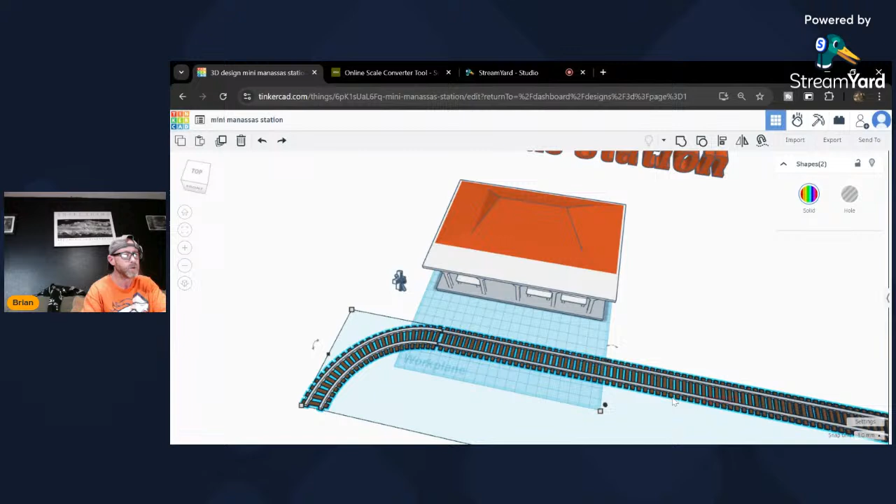So I found these train tracks in Tinkercad, and I was playing around with them just for fun. But it's good for pictures like thumbnails and stuff.

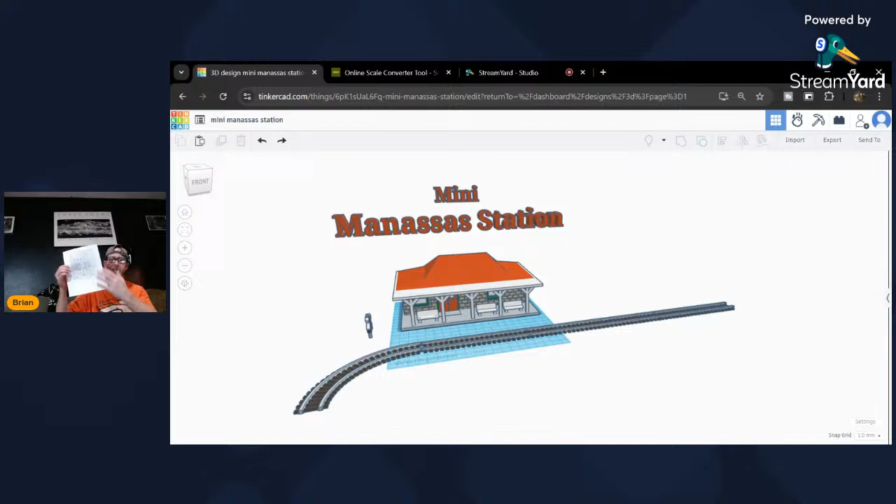So, without further ado, we can begin to work on this. I've got a little cheat sheet over here that helps me with my math and measurements. I wasn't going to show this in the beginning, but decided it'd probably be better, especially if I wanted to hang out and chat with y'all a bit, to at least have something nice up there that you could see.

I think he's got a guy with a bag and parcels, the uniform and everything. Maybe that's what I was thinking, but no, I don't think I've seen it, and it's definitely not that way. I don't see a lot of boxes either, maybe that's because of size, but I don't have any on mine now that I think about it. All right, let's get this stuff out of the way.

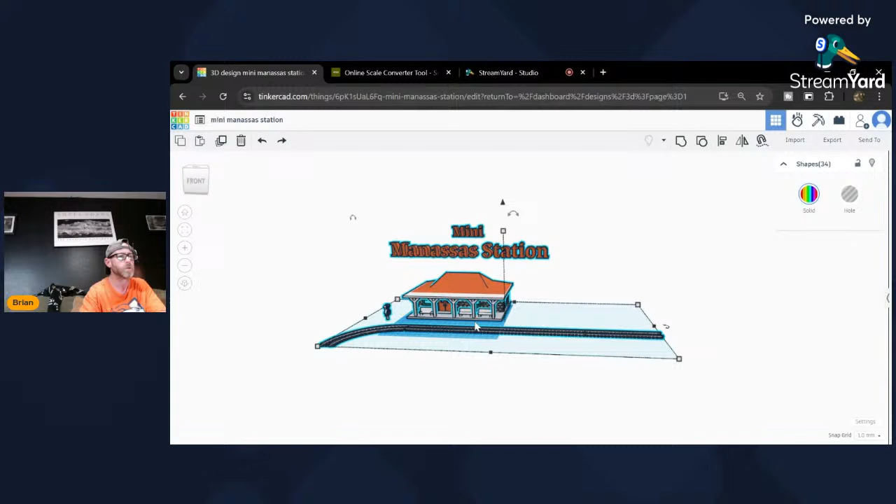We're 14 minutes in, so we might want to start building.

I could probably do this pretty quick if everything I wrote down is accurate, which could be a whole other ball game. But I did try to organize it to the best of my ability, it's on a spreadsheet and stuff. It is my handwriting though, which is the problem - that could cause us some trouble right there.

So what we're going to do is a mini train depot, a model of Manassas Station. I'm going to do a replica of what the real one looks like, probably in scale, and I might even have to do it in Z scale, and it's still gonna stick way out, so much longer. It'd probably be like this, where my cursor is now - down to here if I was doing the real one.

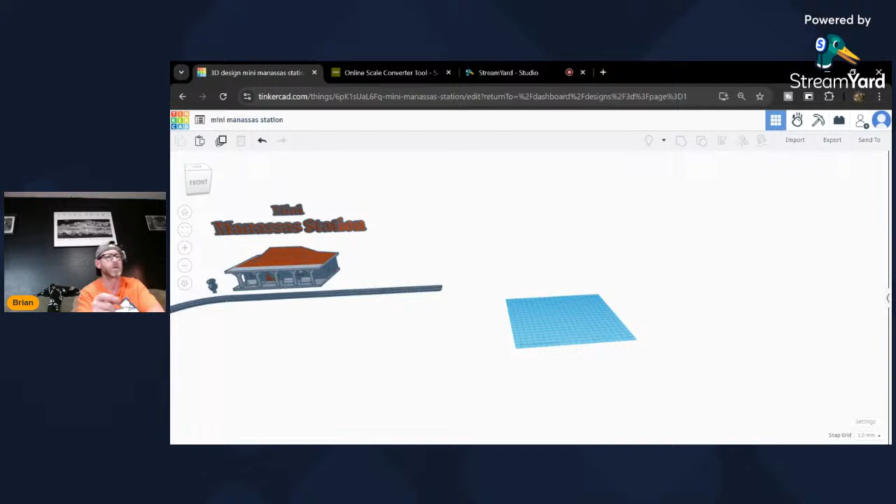The problem with that is trying to show people who are new to Tinkercad how to cut up the model that much and in that many pieces. You've got to do some extra supports if you have more than one dovetail joint at a time. What I actually do most of the time is have interior walls in there that prevent the need for that, for any more than two being joined.

So we're going to start out with the base as always. We're going to make a rectangular base that is 180 by 124 by 3 millimeters. If I do this, my stuff comes back, and we'll change our color. 180. 3.

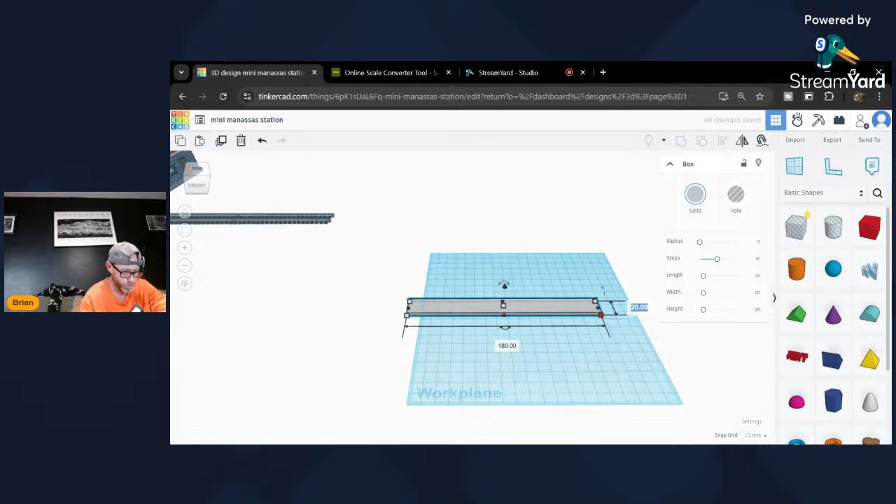If any of you guys already use Tinkercad and you see me doing something repetitively that you have a better way to do, please tell me. I am not above learning from anyone.

Well, I think a few of y'all mess around with it. Dwight, you mess around with Tinkercad if you're still there, a good bit, huh? I mean, you're pretty good at it, I think, unless I'm mistaken. Because you do cars and stuff - I just thought about that. Don't you do cars and stuff? I know I've seen videos of you printing cars. No, okay. But you print stuff, right?

Alright, and now we need the building. And the building is 174 by 80 by 40, by 2.

Okay, I understand. So we're going to bring what is going to be the body of the building, and it is 174.

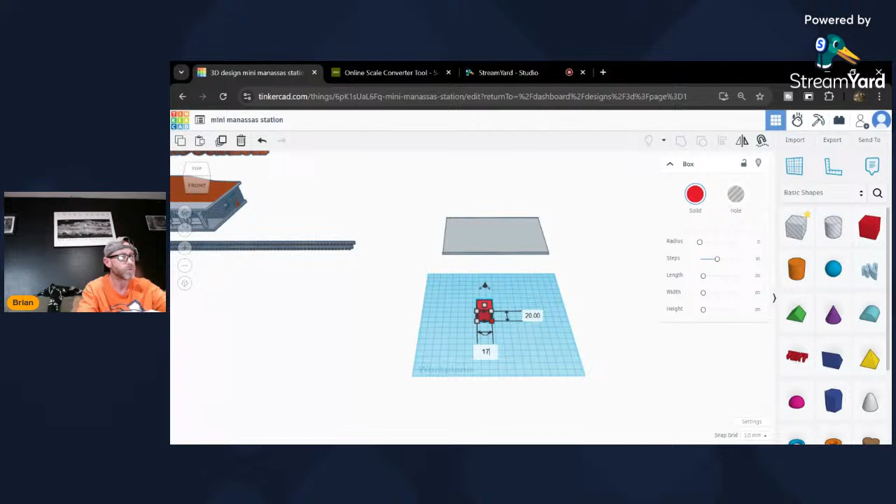I wish I was able to have little text up on the screen when I typed, that would be really cool. 174 by 80 - StreamYard was asking for ways to improve, but I think that's for people that pay, so that's not going to help me. By 40. And I'm going to elevate it 2.

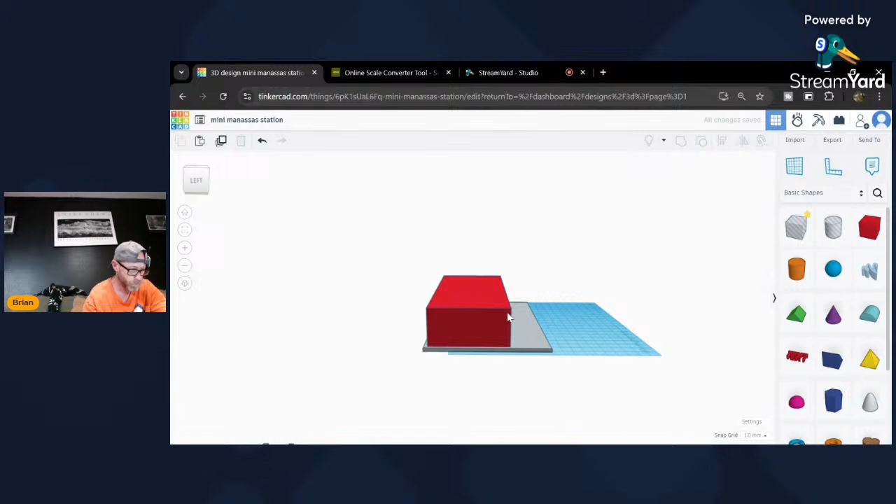As usual, what I'm finding is that we're going to hollow this out. So I duplicate, I turn the new one to a hole, and then I work my way around the black dots on the outside to change uniformly. I think you could do it a quicker way.

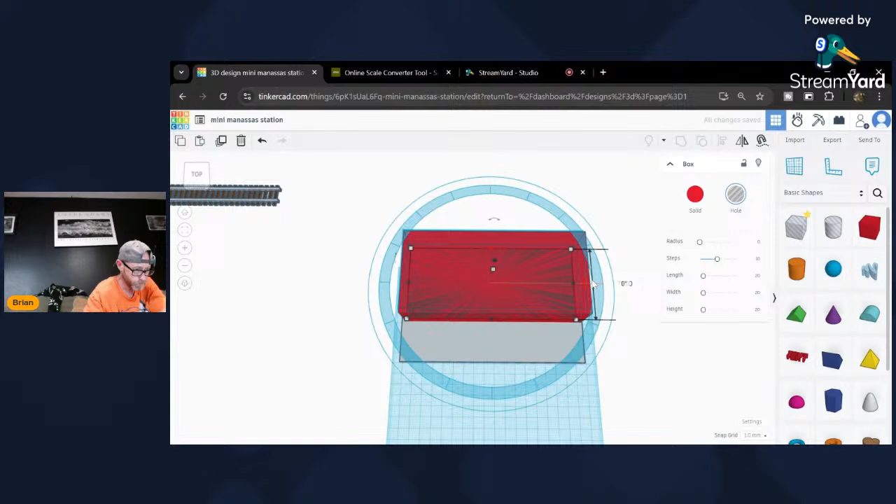I think I'm going to go 3 around, that way it can be rescaled. 77, 171. If you're HO scale, I would do this 2 everywhere, maybe 2.5. And 3 would be 168.

Come here, lift up, here and here. And then I hold shift and I want to click only the house, not the base, because I don't want to cut any of the base. And I group.

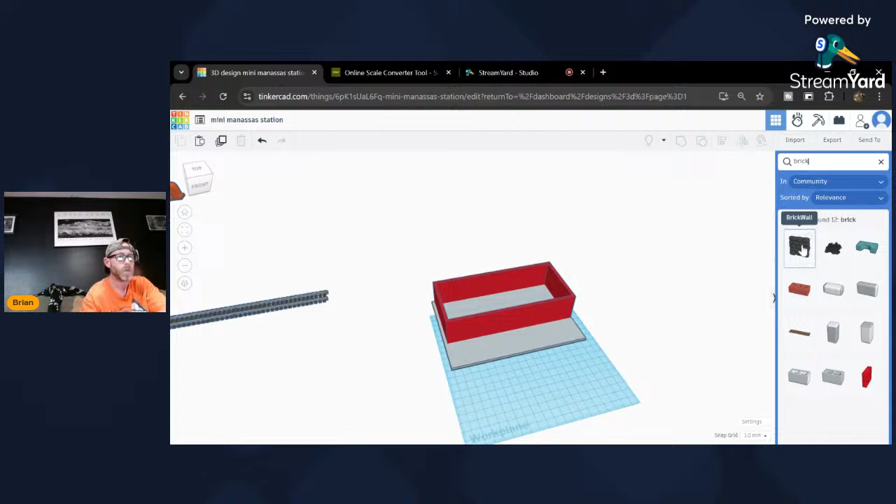All right, now I'm going to come over here and go to search and do bricks. And I don't think I got the one I wanted. Brick - there we go, and this is called brick wall. I'm going to bring it in.

So what I'm going to do is shrink this to the size of it, let's get it to about the right height.

And now what I want to do is I'm going to duplicate this. I'm going to use my arrows to bring it this way till it stops at a clean looking place. And then I'm going to duplicate it again and again. I'm going to select each and I'm going to group.

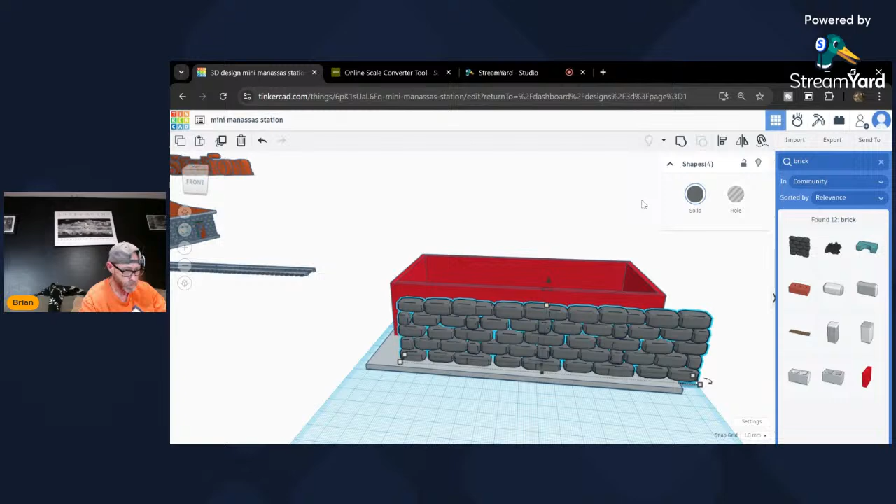Now I'm going to turn it to a hole, and I'm going to put it right up there, get a good view. And what I want to do is change my snap grid down here to 0.25 because I want this to go in 0.5 millimeter. So it's touching, and I go 1, 2. Okay, so we're in there 0.5 millimeter.

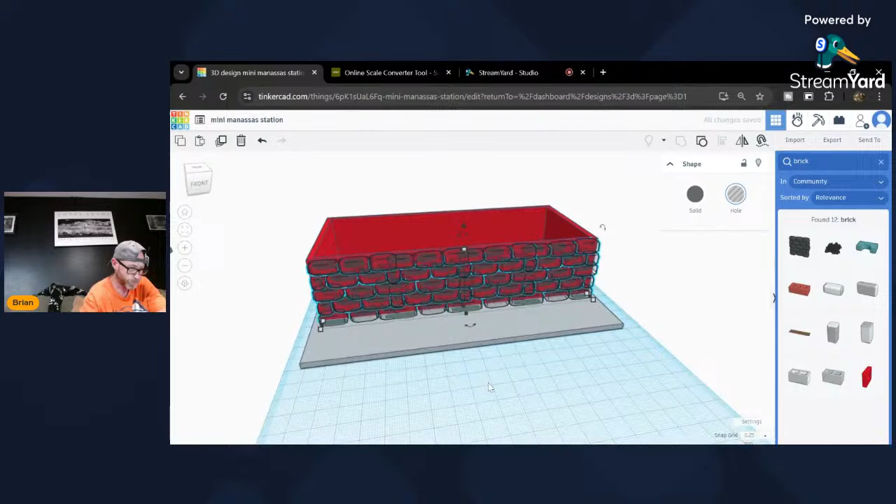And I'm going to move it right because I didn't get it - I almost didn't do enough, did I? All right. Now I will duplicate and use my arrow to move this over to the other side and do the same thing.

Back it off. All right, it's touching, 1, 2. I don't want them real deep, I just want to be able to - I want them to be seen.

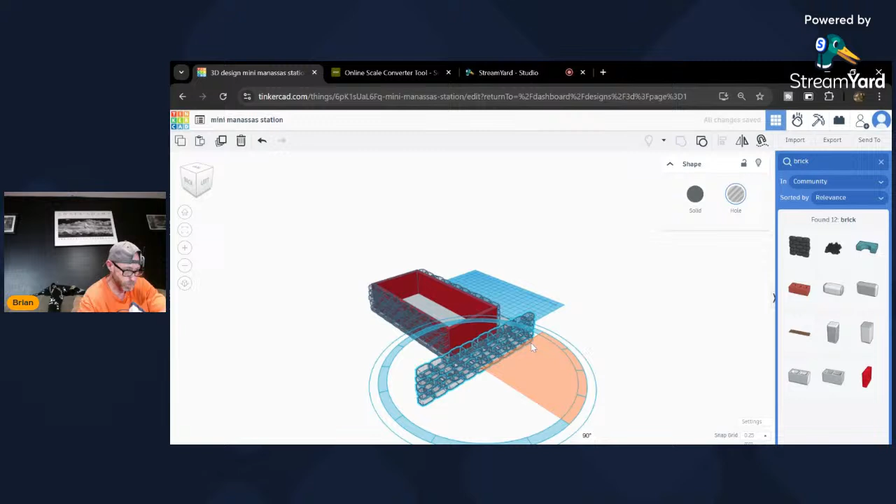And we will - I'll click off, click again, duplicate. I'm going to bring this way, and we'll spin it 90.

Yeah Dwight, I was thinking maybe you were designing those cars you were printing, and that would have been real good. I would have felt silly trying to act like I was teaching you something sometime.

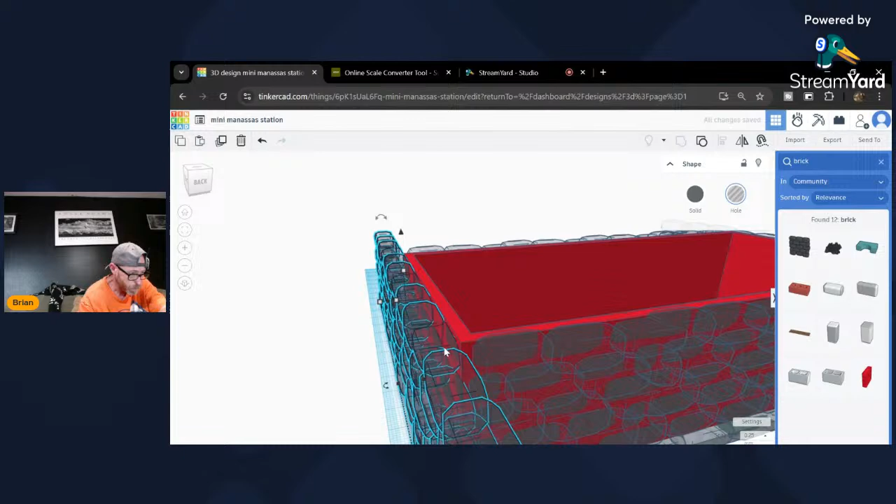1, 2, we're in there. We'll duplicate it, move it over. Uh-oh. All right, I feel like that one didn't go in as far. All right.

And what I want to do is just select the body because I don't want to cut anything to do with the base down there. And then I group - we'll see how this looks. We might need to go back and push them in further. Probably should have checked - yep, I should have.

So we will undo, and let's go in twice more. Uh-oh, I hit the wrong button. I'm going to take it all the way out again. Okay, there - 1, 2, 3, 4.

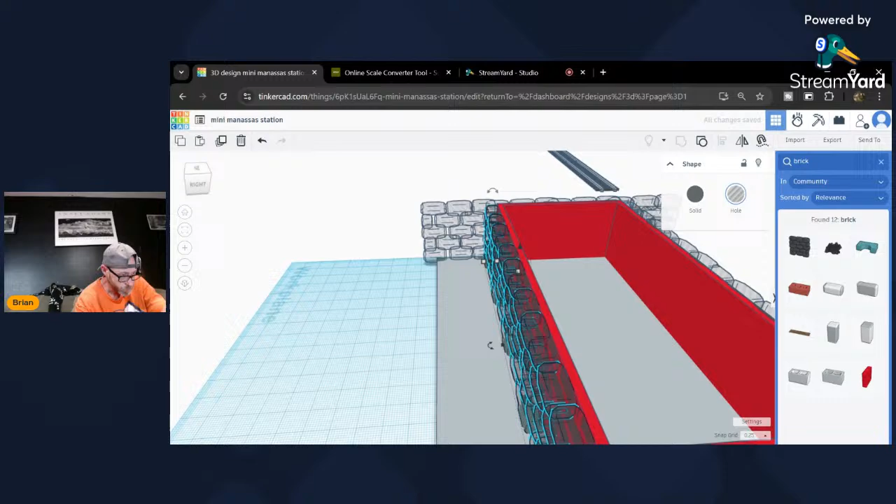And let's see how that looks before we move on. It's better, let's see. I used different - I know I did, I must have used a different brick wall there. Look, that's different, I knew that wasn't looking right. Dang it.

All right, let's see, can we make this work? I don't know, I'm going to do an undo and undo. And let's move this stuff out of here for a second. Let's see if we can make this work.

You think if I shrink them down, John? What is this? Hold on, let me see.

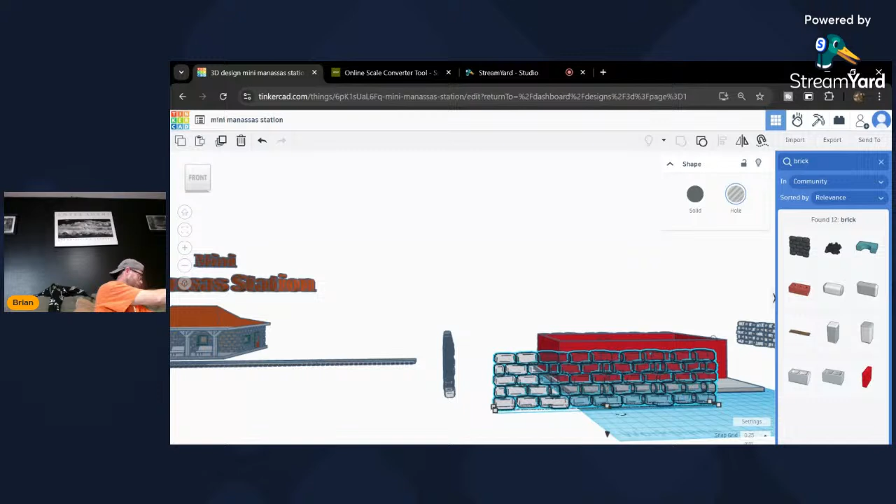So yeah, what I'm gonna try to do is, I guess I could go see if I can find my right bricks - it'd probably be the best thing to do. I didn't write that down, dummy.

Nope, I don't think so. Here it is. All right, yeah, that's better. I've used those before, but not on this project, and I didn't like the way that looked at all. All right, so sorry for the rewind.

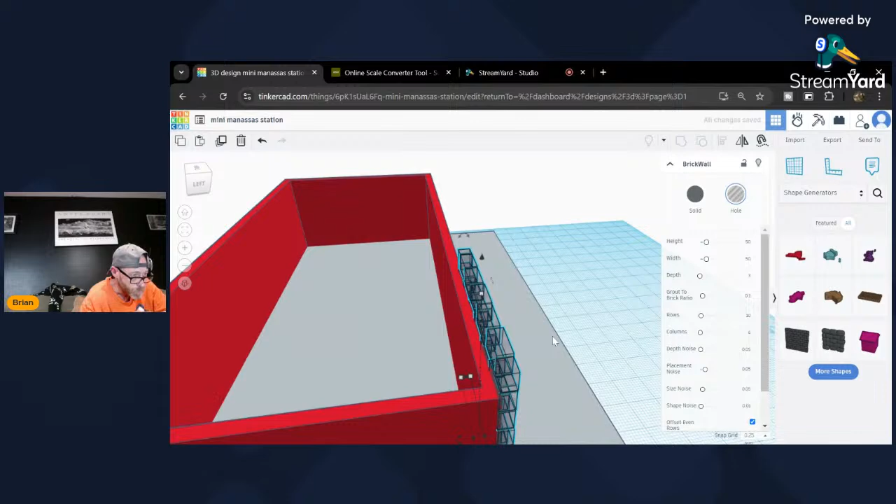Now if I'm not mistaken, this works - let's go make sure. Yeah, all right, and so when I put that in there, I get this - ah, yes. Okay, we'll undo and redo what we did before. So we're going to duplicate, move over.

And if you are curious, I shouldn't have done that, Brian. Here, let's shift and do this again.

Some of the movements, and when I say click duplicate and things like that, I do have some videos that show how to do all that stuff. Really simple stuff from the beginning if you were wanting to do that.

Because if you've got a 3D printer, you should play around with making your own stuff. It's just kind of cool. We're modelers, we like to see our finished product, and it's just another form of that. It's kind of like, I guess, Nissy called it scratch printing one time, when you design it yourself.

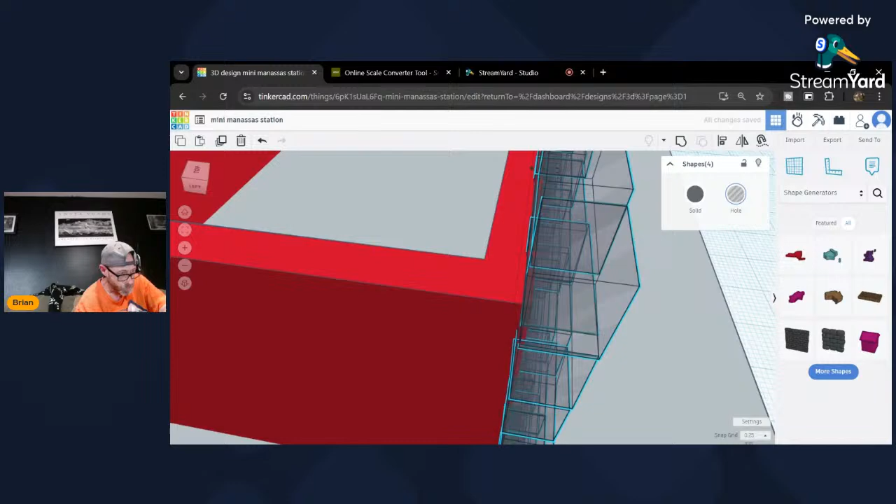Let's see, I've got it in two. Let's see if that's enough. Yeah, it is. So once we know we're okay with it, we group it, duplicate it, and move it around.

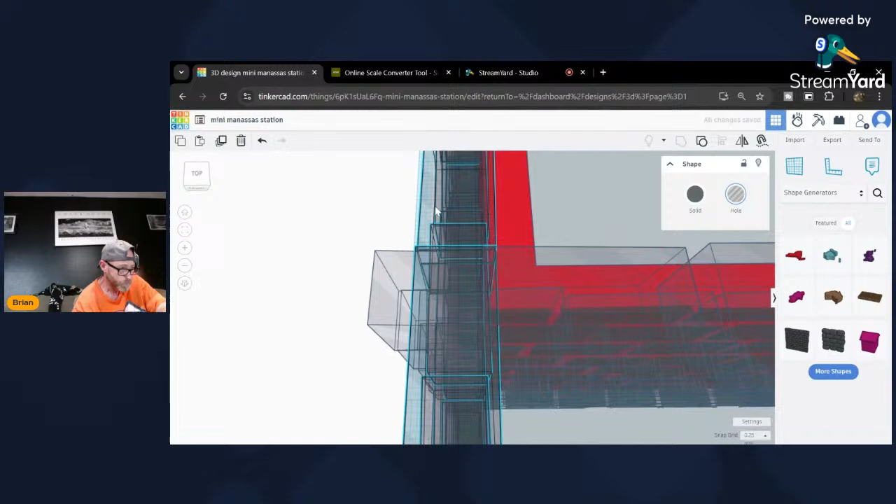Almost back to where I messed up. Uh-oh, undo is your friend. Yeah, 1, 2. I assume if I would learn the hotkeys, I would probably save some time.

Oh, that's cool, Dwight. That's really cool.

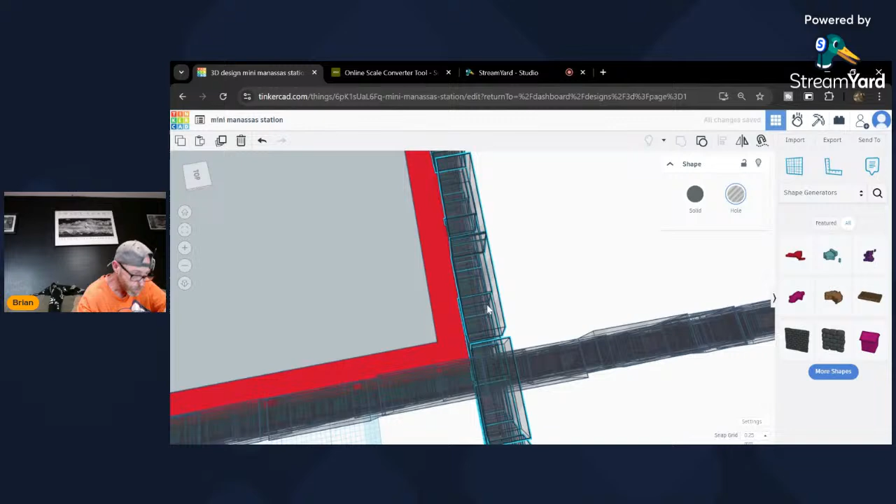I have a neighbor who has a saltwater aquarium, and he has all the coral and all that stuff too. I printed him a little thing to go in his aquarium so he could test the coral to make sure it lived before he secured it to the rest of the coral or whatever. And so there we go.

I'm going to change the color of this to that because we're about to have an orange roof. This is supposed to be at 2. I'm not sure why I put it at 2 and not 3, but I'm going to follow the notes.

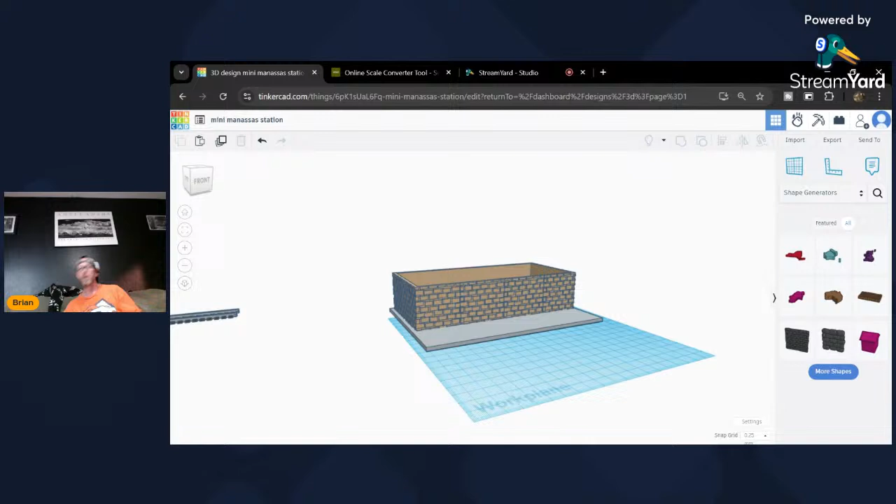All right, the roof is tricky. If you remember, looking over here, that wasn't super simple to make. And so, you see, I got little places for the beams to fit there, and so we'll do all that. This part right here is a little bit challenging. So we'll see how I do.

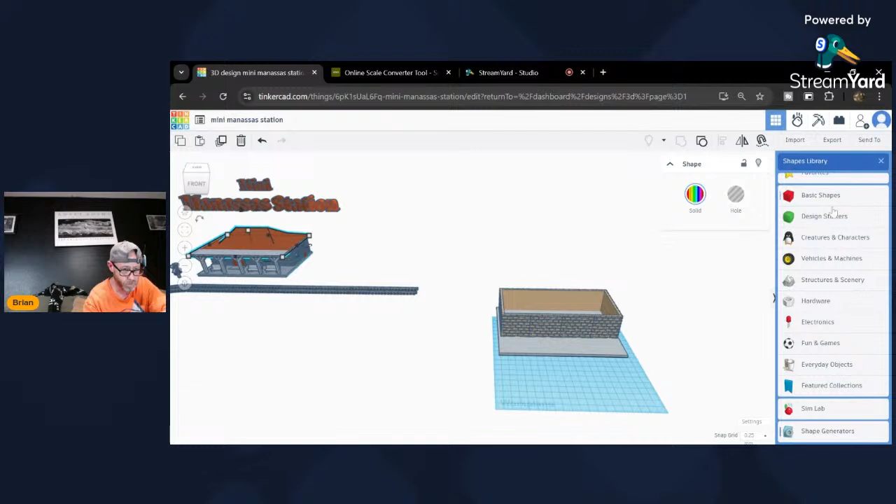I need a pyramid that is 190 by 95 by 24. So let's go to basic shapes, pyramid, and we're doing these in orange. What was it? 190, 95, 24. By 24.

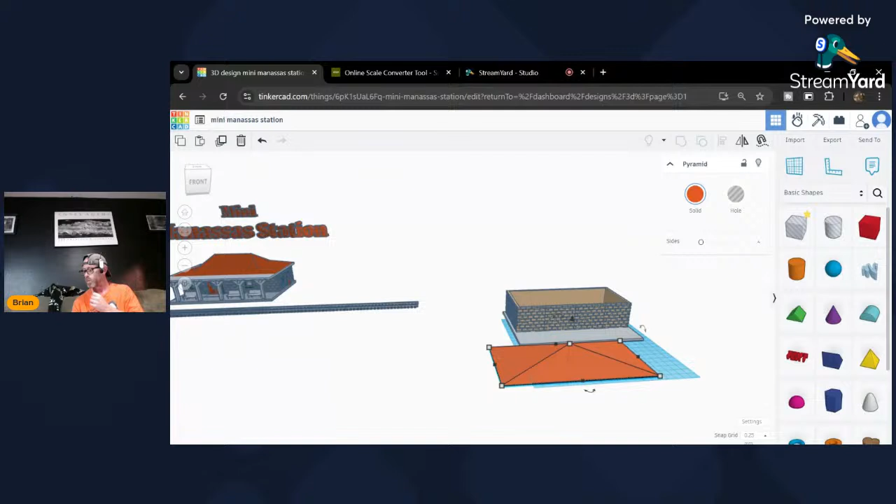All right, so that's part of it. Now we have to go get a roof, and it should be 132 by 82 by 30. Roof.

I'm going to leave it green for a minute, but I'm pretty sure... uh-oh. All right, I'm pretty sure we're supposed to do it this way. And then we need it, what, 132 by 82. By 30.

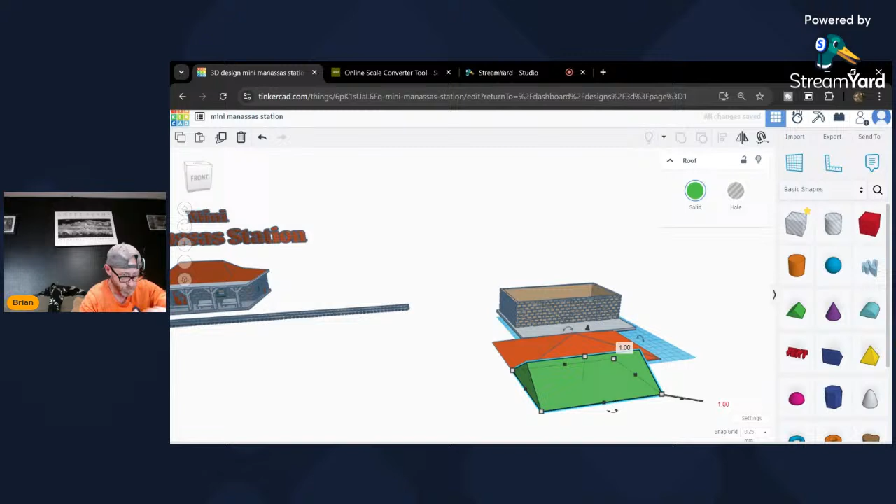All right. Now, this is supposed to be up 1, if I'm not mistaken. Yeah, 1 higher than that. And then, I think I do this. Yeah.

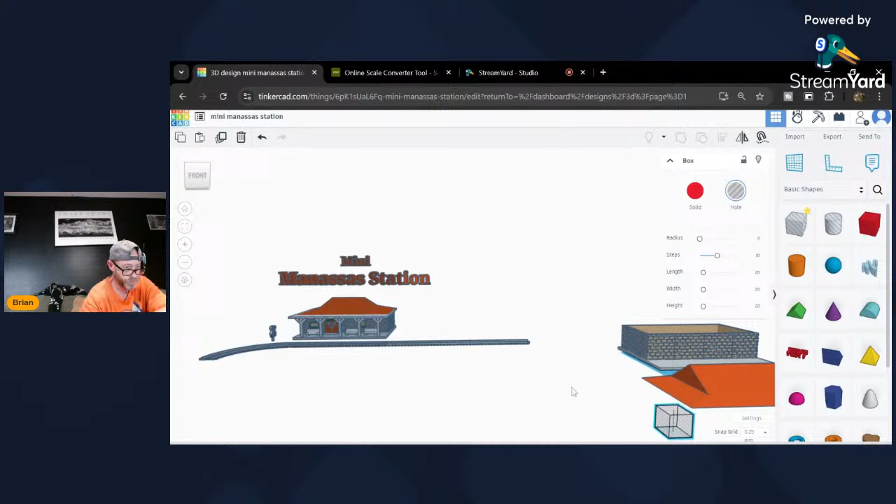All right, now we will go ahead and change the color now to orange. We will group these two together. Now we've got to cut it out. See? We've got to cut that piece. So let's see exactly how.

All right, so I got to bring this up to 42.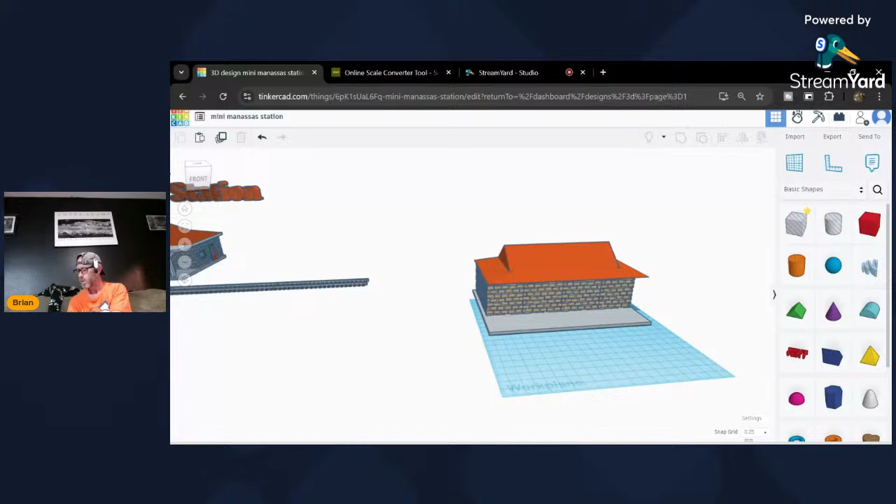And then we will need this, 80 by 50 by 40. And 80 by 50 by 40. All right, now,

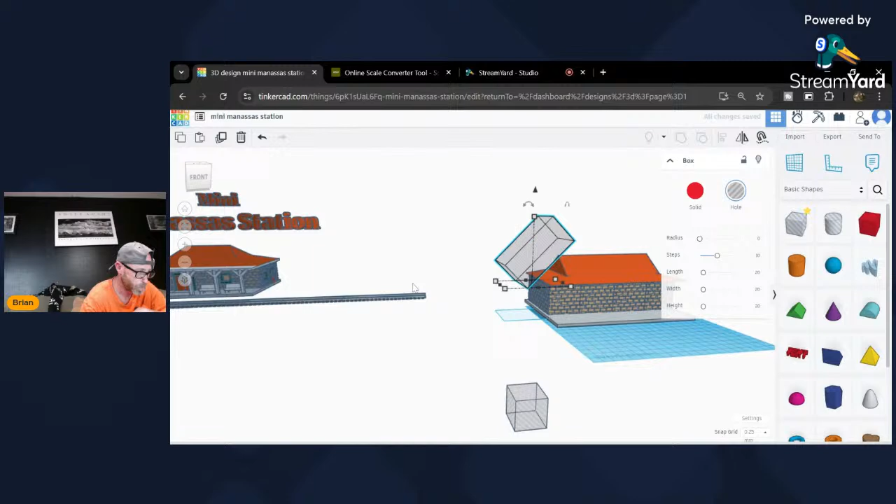says I need to rotate it. No, I think it's 22.5. Yeah, that's it. And then my elevation should be

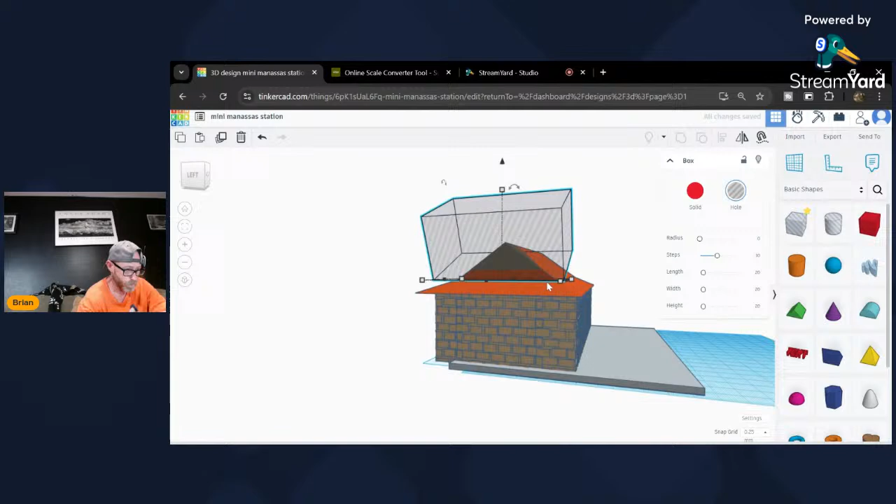Uh-oh, don't want to do that right now. I'm going to drop this. And I might have done this backwards. Yeah, because my elevation should be 50. No, that's not right. Well, it is. I need to move the model, the rectangle, till it matches.

All right, there we go. No. No, I'm gonna... Okay.

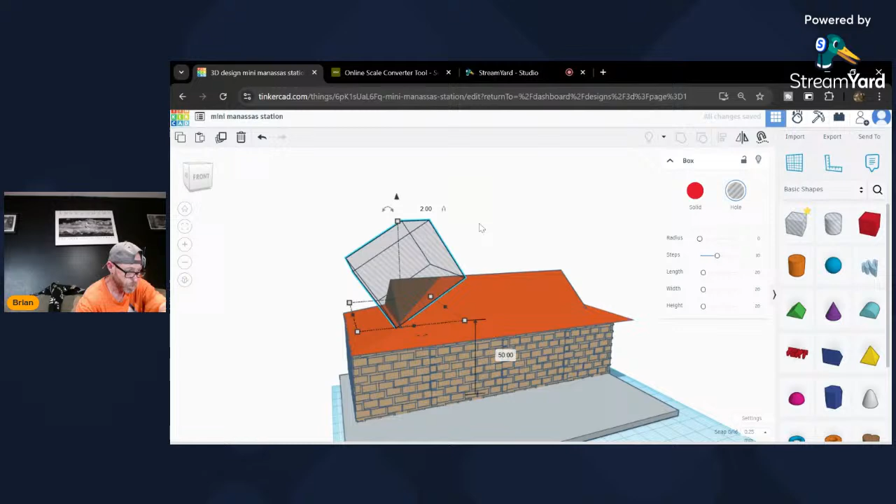So what I'm going to do is redo this because I didn't do that very well, and I want to re-show y'all what to do. I didn't notate how far I'm supposed to do a rotation here, and I can't tell. I might have done - you think that's 45 instead of 22.5? That's probably what I did wrong. Maybe, let's see.

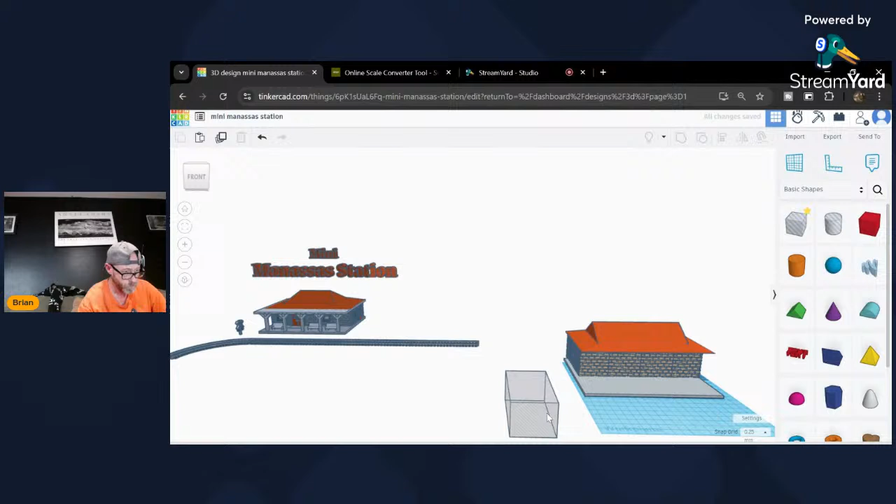What did we say? This was 80, and this was 50, and then 40. And then it's telling me the elevation is 50.

I'm going to do the elevation here at 50.

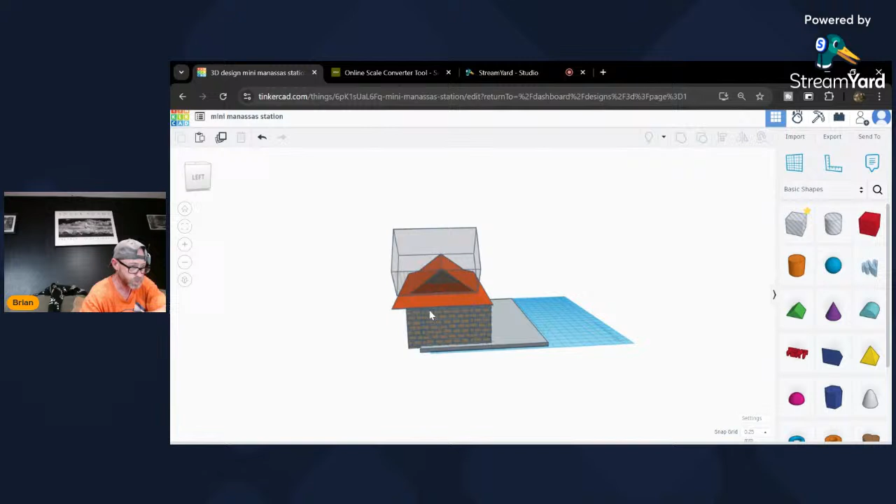So I did have this right in the first place. And so what I needed to do was 80 by 50, and yeah, 80 by 50 by 40.

Then I brought it up, tilted it 45 degrees. All right, now it should be at 50 in elevation. Then you can use the arrows and it should come in and work right this time. And I believe it did. Thank goodness. All right, I just didn't write whether it was 45 or 22.5 there.

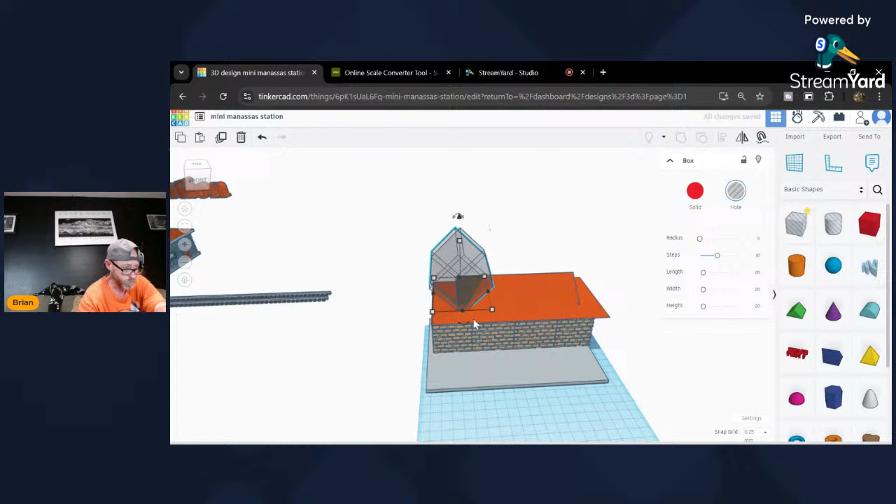And let's do a duplicate, and we're going to do a mirror this way. Then we'll use our arrows. And now we've got our elevation and everything set, so now we just need to get it over here in the right place. And then we can do that other cut.

What will come another time is how to actually put some shingles or tiles on this shape, a shape like this that has a multi-faced shape.

So what I want to do now is start grouping a few things. I want to get all this lined up properly. So this needs to be here, and then we can't use that for this, so I just needed it centered. I just want a little ledge back there, not much.

Now I'm going to do this and this because I want to use my align tool again. So I've got to group these together for a minute. Then I'll change it back to multicolor so I know the difference. And now I can align this shape and this shape.

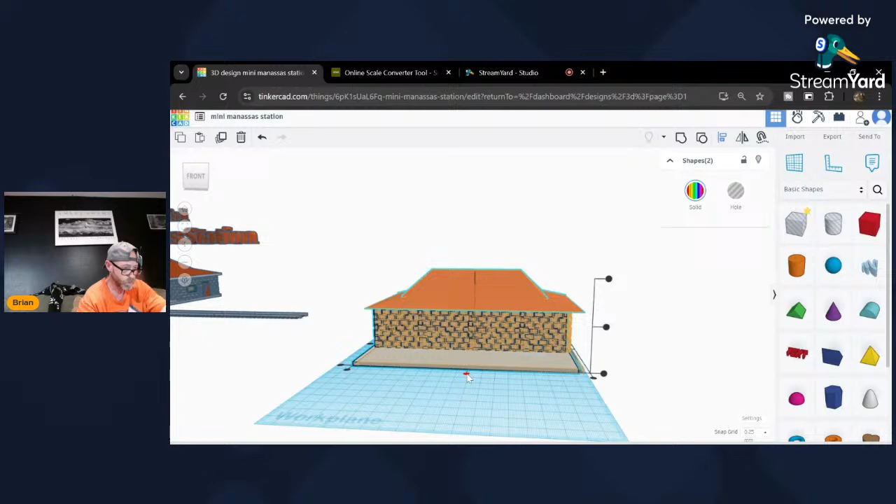And I can again do this like this. And then I'm going to do this one manually for now because I don't want to go ungroup again. But this should mean here and here, here. No, we weren't right. There we go. Now we're centered.

Okay, and we can ungroup. And so now we're where we need to be. We can actually even do, if we wanted to go ahead and make sure that now that we ungrouped, we could do this and make sure we're good there. All right.

Now we're going to do the bottom roof piece, which is this piece here, because this piece here, it's going to overhang as well. That way we can print it in one piece. And this is going to thicken up this base because it is very, very difficult to print something that comes to this thin of a point and keep it real true all the way around.

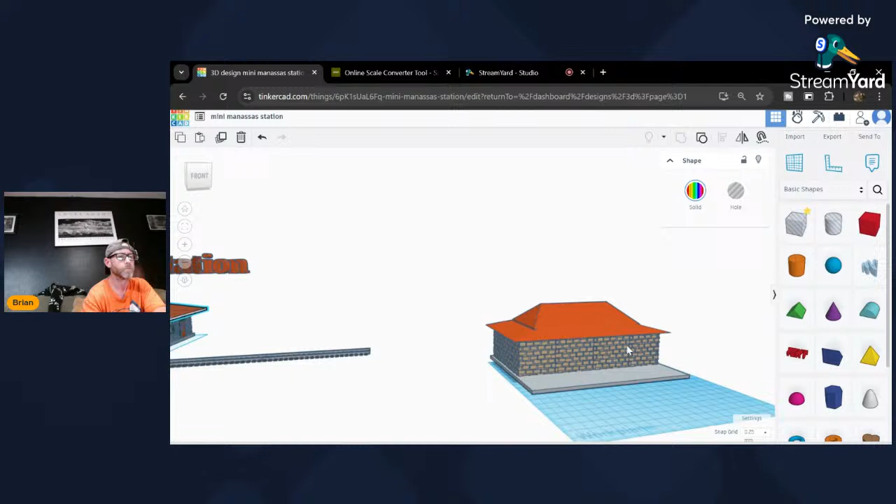And especially when you're pulling it off the deck and all that other stuff. It can be done, but it's just tough. And so what I like to do, because this is going to be laying flat, is give it a little bit of base so it stays more true.

During printing, after printing, when you're assembling the model a year and a half down the road, those kind of things. So 192, 194 by 2.5. Make this white. 192.

Oh wait, 190. That should have been 190 by 82. This phone's killing me, timing out.

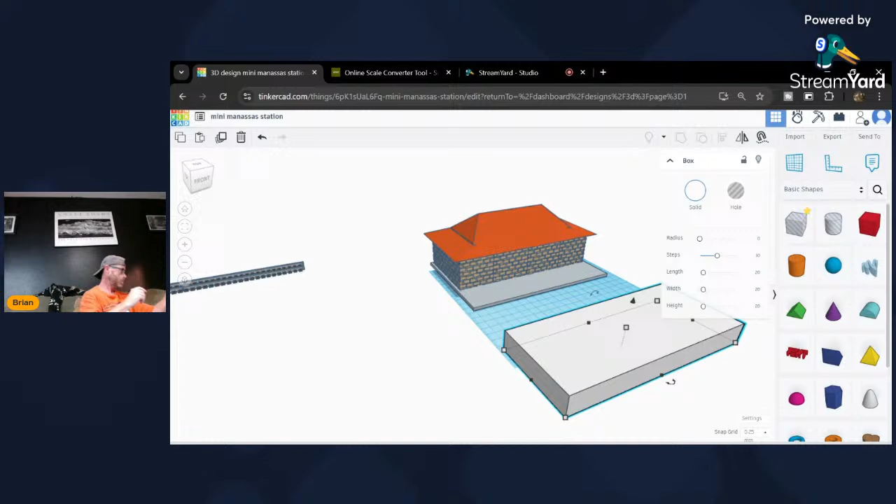Oh Dave, yeah, I'm sure you got plenty of people in the community that could get you that far, but we can all help. I had no idea somebody so proficient at small engines and everything, and pretty much everything I know about you, you're good at.

What did I say? 190 by 124 by 2.5. And then we need to go up to 41. And we're going to go up to 41. All right.

Now. Oh, I didn't. What did I not do? Something's not right. Oh wait, something I didn't do right. Bottom roof. Oh, I didn't look at the... There we go, makes more sense.

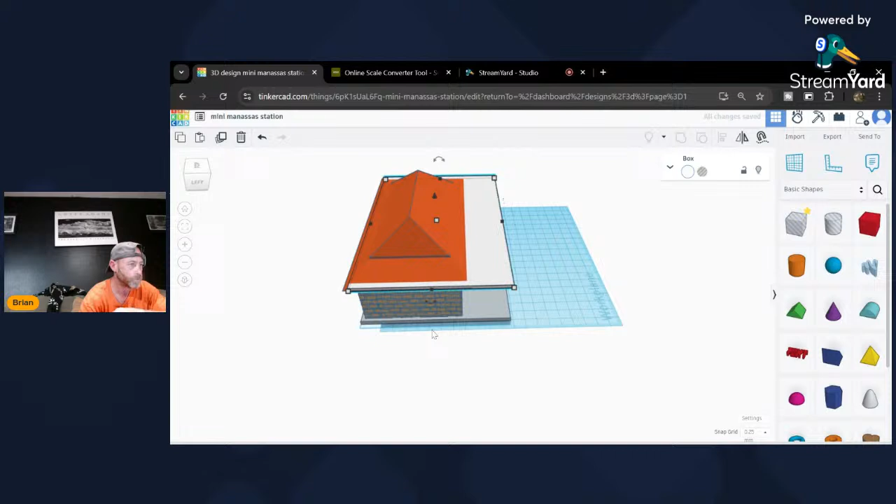Here, here, and now I'm going to do an alignment back here, like so. And there we go. Go ahead and group it.

Yeah, you sure can. I keep having to touch my screen. Oh, you know what, you big dummy. Oh, I see, okay.

Well, you know, sometimes you know other things and don't have time to learn all that stuff either. And then patience is required, especially at the beginning of learning anything. And then technology, the way it acts right sometimes and not others makes it even worse, because sometimes you can be doing the right thing and it's not working.

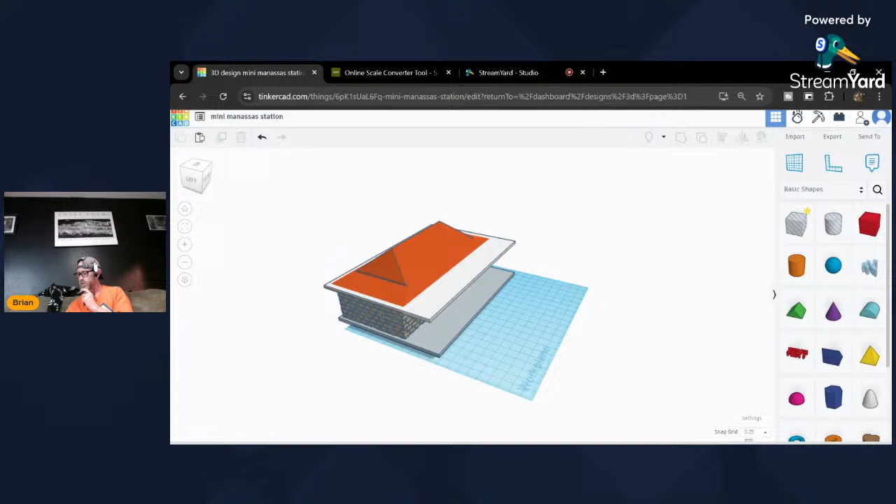So all right, so we got the roof, that went okay. And we're going to do a cutout, it looks like, for the door and the door frame and the doors themselves. And then we will do the ticket window, the ticket window frame, ticket window cutouts, all that stuff. Then we have regular windows we're going to be doing.

So it looks like how we'll be doing this is we're doing this guy first, then we'll be doing this guy, and then I think we do the windows on both sides and then the doors on both sides, and then we come back and we're going to do the beams here, and then we will do the benches. So yeah, we won't be finishing this evening because I worked all day. So yeah.

Um, yeah, well, if you got a laptop, that's a starting point.

I wish I had the energy to airbrush, but I'd have to pause this at some point and go over the airbrush, and I'd have to mix the paint and all that stuff too. The airbrush isn't even together, but it's super clean. I cleaned it good, it was nasty too.

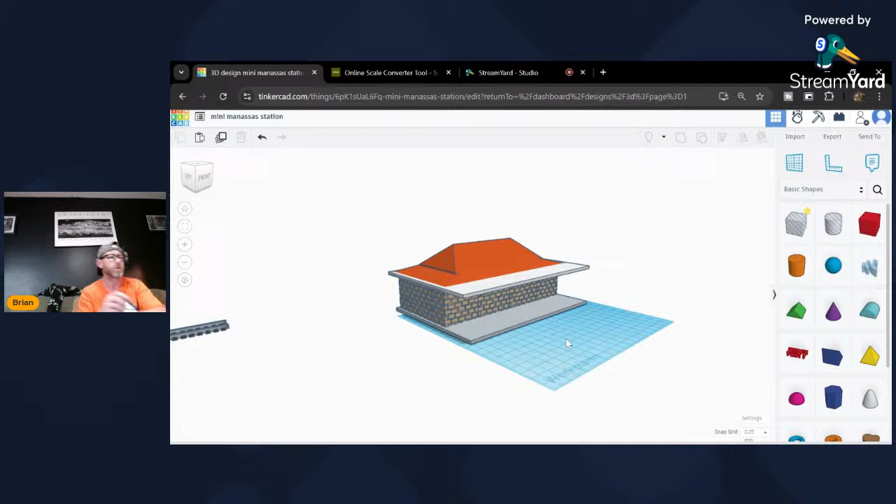The doors aren't really exciting. I'm not too enthused about doing them, but I'm going to be doing it. It's going to be 3. I put this off center a little, but not much.

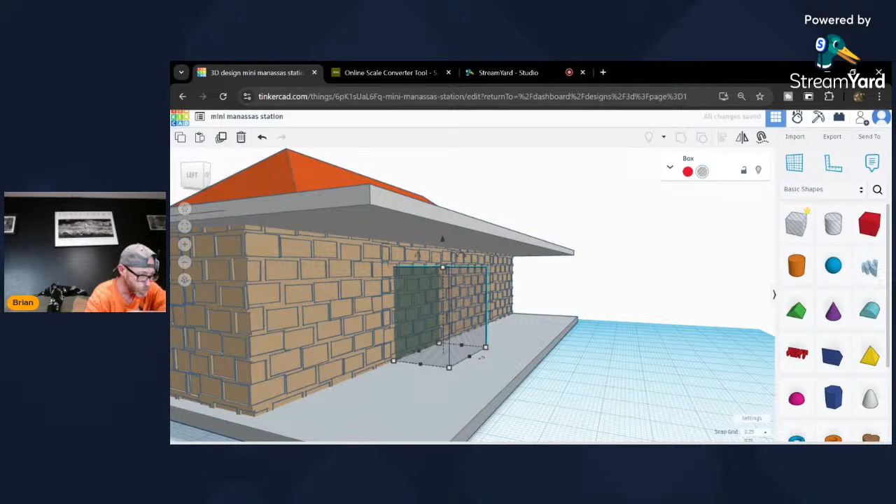So what I'm doing is I'll wait till we don't see it. Alright, 1, 2, 3, 4 - let's just do 2. I'm making a little bitty cutout that will hold it.

It's a little seat, and what this will do is give me a little place to glue my door frame in, that I'm getting ready to make. So particularly if you don't have it together yet and you glue the door frames on, you flip this on its back and that thing will stay in there. You just put a little glue on there, set it in there, and walk off. Basically, it's a guide. Not only that, it's a seat - it holds it and keeps it in place too.

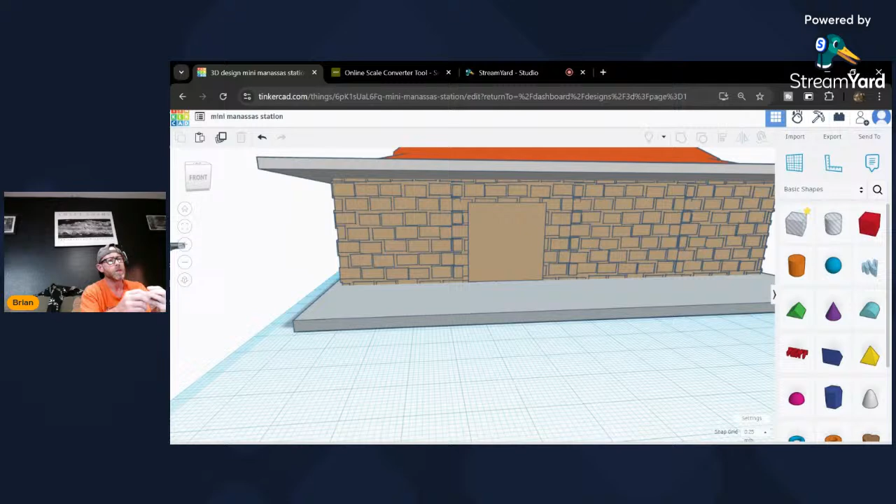I could make it a little deeper and tweak the models really close and carefully where they would snap in, but with different humidity levels, and if I use a different printer, one's going to snap in better than the other because I use a couple different kinds of printers sometimes. I mean, they're both Enders, but still one of them doesn't act like the other one at all. Matter of fact, it's not working good, and I've got to do a little work on it. It's printing thin, so I might need to change a Bowden tube or something like that.

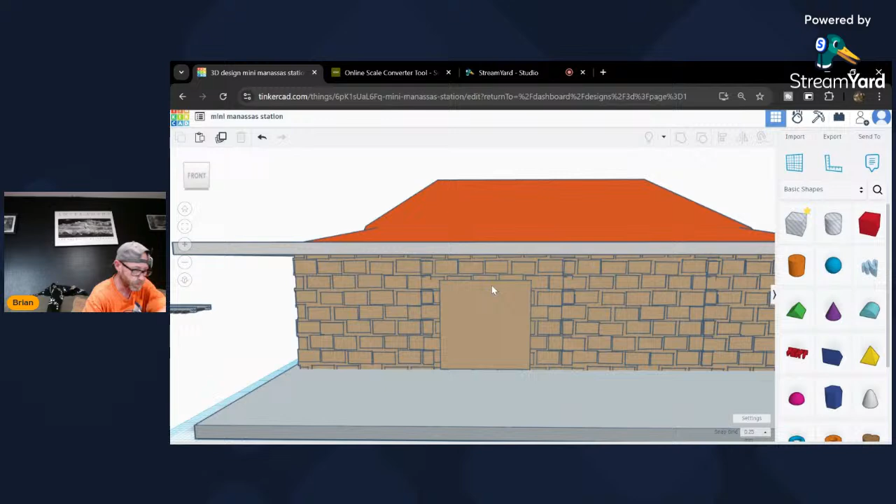Next we're going to actually do the frame. The frame's 29 by 29 by 2, up 3. So what I do is if I do the seat at 30 by 30, I'll usually do the frame at 29 by 29. And my 2 doors, because this is going to be a double door, my 2 doors together will be about 28, 28, so I try to leave 1 millimeter around everywhere for these, just so it's not oversized.

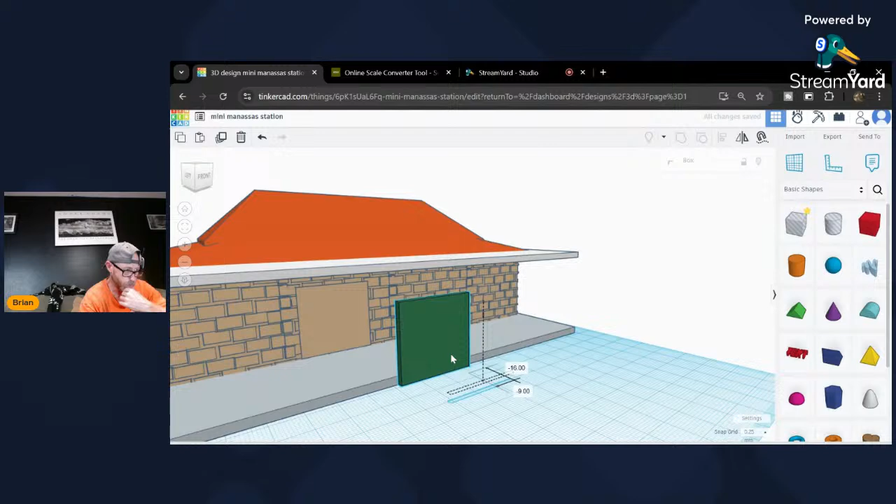So I will bring this in, and I need a 29 by 29, and width is 2. We're going to raise it 3. I'm making mine green. And it sits right there.

Another transparent - we're going to cut out the place in the door frame to hold the actual doors. So just like we did a cutout in the wall to hold the door frame, now we're going to do a cutout in the door frame to hold the doors themselves. It looks like 25 by 27, so 27 here by 25 tall.

And we're going to bring it up to 3, because we don't want anything at the bottom. All I want to do is use my arrows - uh-oh, I went in too far.

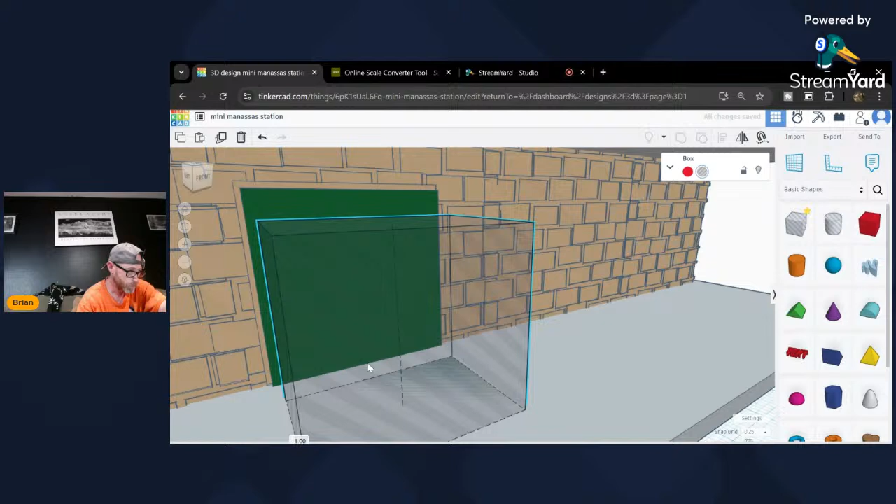Somebody streams at 8, right? Meaning an hour from now.

And we'll move here, make sure we got a little space. I'm gonna back out, touching 1, 2, shifting here. Alright, there we go.

So now I'm going to have double doors here with handles on the insides, but we've got a seat for those - you see, a place for those to be held. So the doors, they'll be duplicated, and there's 2 of them. They're 12 by 25 by 2.

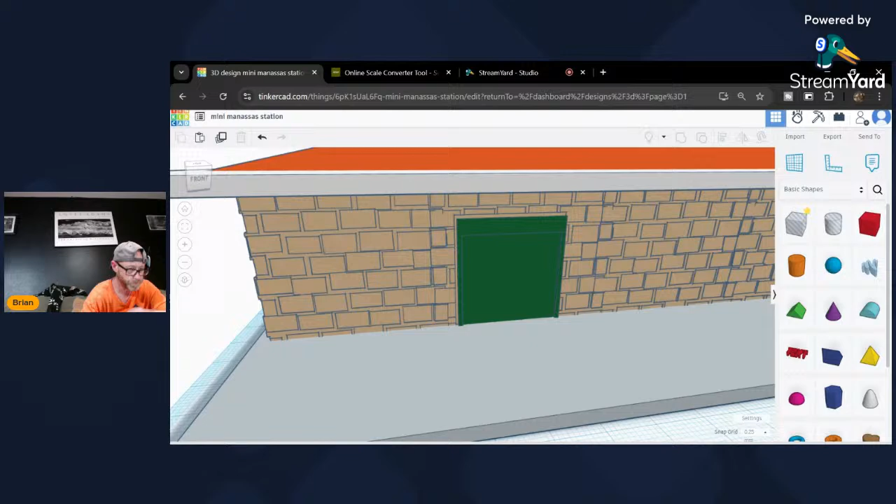And I'm actually going to do them - let's say 12, this is 2, and we'll say 24, and up 3.

Cab Crew Wednesday. Is that Trackside Mike and Dundas, or is that a different day? Did I get that confused?

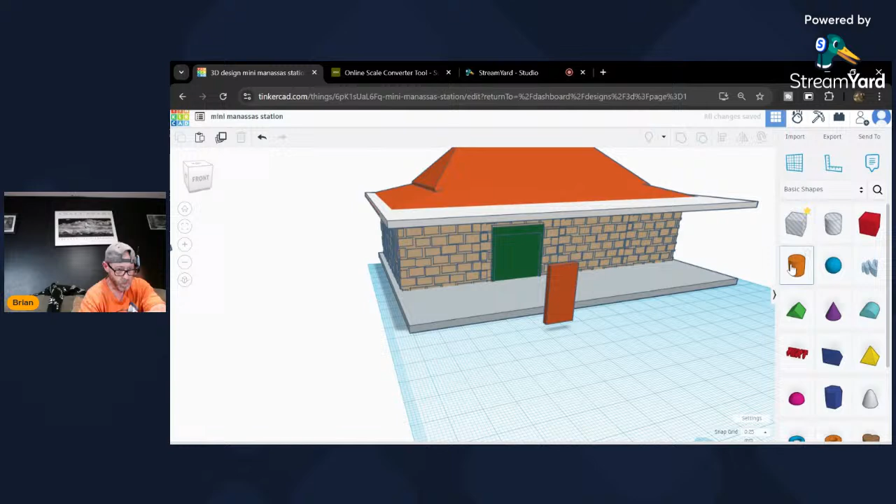I'm gonna make this black. Yeah, I could do it orange. Orange would look good, I think I did it that other way too. All right, let's get a door handle here.

1.5, 1.5, change it to silver. Here we'll go 2. We'll spin it and we'll place it.

Looks about right to me. We'll group them. Change to multicolor. Now we'll duplicate and we will mirror that way, because we only have to do it once - we're lazy sometimes, right?

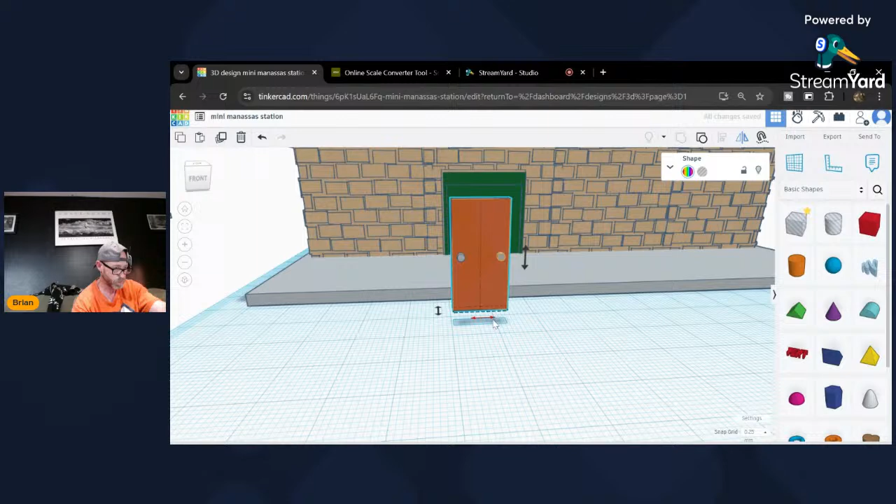There we go. Here. Here. And there.

All right. Now, what did I do those with? Let's see. Okay, yeah, I can see with the chat. I wish the chat was a little bigger on my TV. I don't know how to bloat it up though, but I can see it kind of.

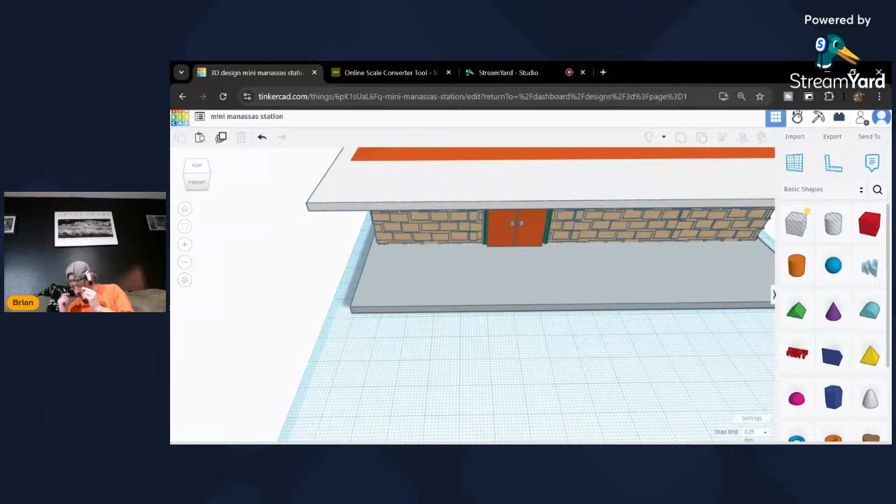So I got a window. Door windows are 7 by 7 and they're 20 up. So we're gonna make windows for the doors, and they're 7 by 7 with an elevation of 20.

We'll come here, I'm gonna bring it down, here. And I'm going to duplicate it and bring it over. Now I've got to go through the door frame and the brick wall.

So I click this and I do duplicate, duplicate. There's 3 of them there at one time. Now, I don't want them all grouped, so I'm just going to see - if I do it all at once, it's going to group them all together. I don't want them all grouped, so I did it in triplicate.

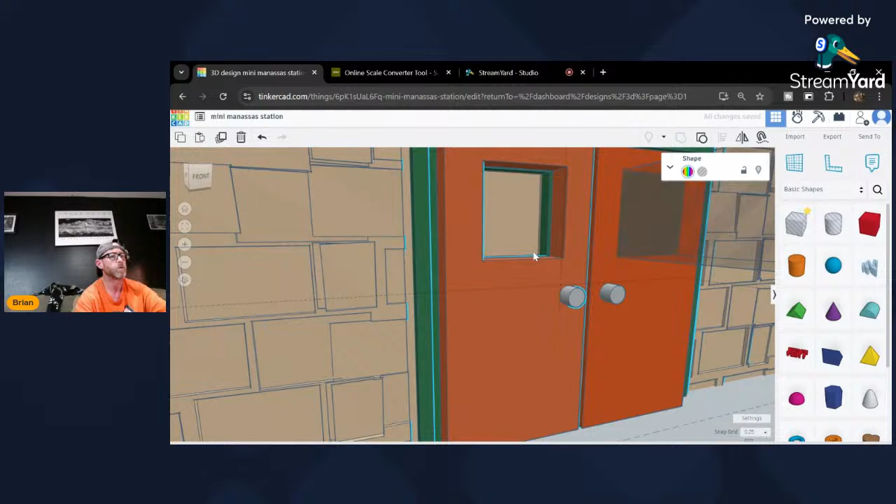Now I'm going to hold shift and do the door group. You know what, I should have done that first - here in the green thing, the door frame, and now here in the wall there. Now you can see in there. I say you can. Hold on, I want to make sure we can.

Something's grouped that I didn't mean to, so we want to ungroup. Okay, why is this grouped? I didn't want that group. Now let's bring this back where it belongs.

Get these out of here for now. All right, we'll duplicate it, mirror it, bring this one over. And now let's get these back where they belong, here.

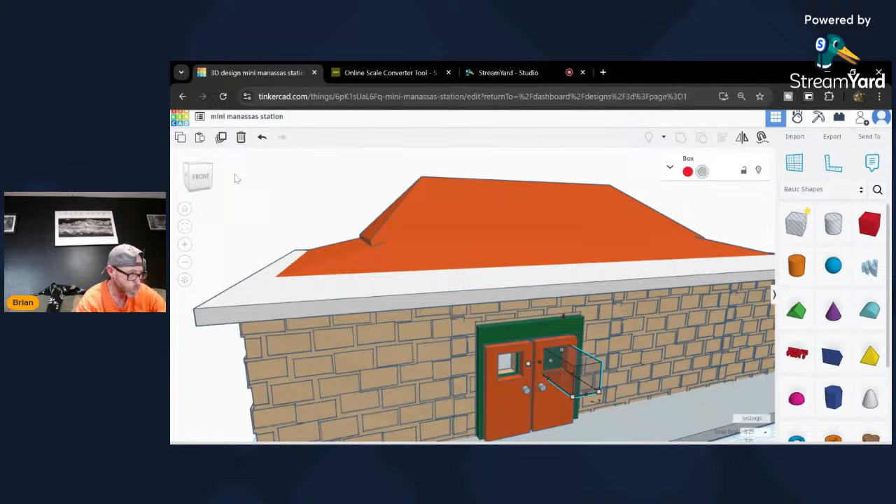All right, and duplicate. Now I click this one and that, and this one and this. Now we can see in there. All right, here, duplicate - I click the door frame and then I click the wall. There we go, now we can see in, and that extra door is in there.

So what I'm going to do is just move it over here because I'm going to use it later. All right.

I'm thrifty too. All right, now my stuff all got jacked up. So we're going to go here, here, here, here, and group. Now all this is together, so I can go here and here and align, and I can get everything back where it belongs.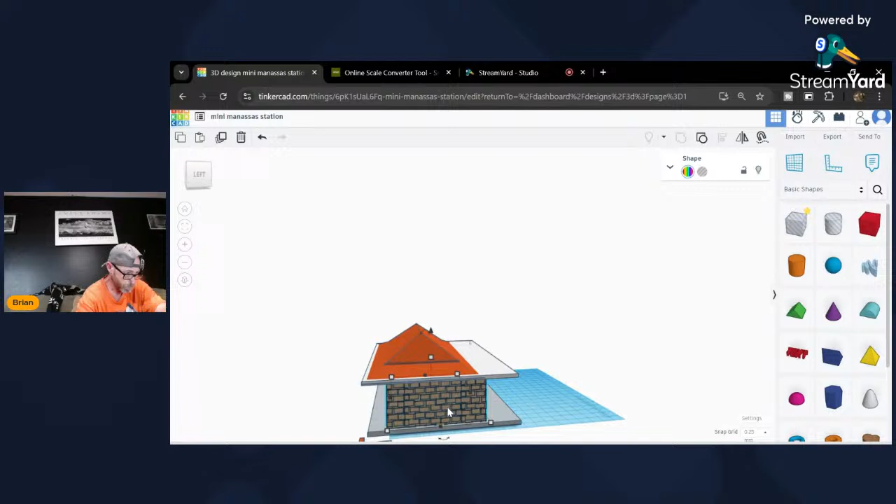I just want to make sure this and this are centered. All right, now I do this and this and I group it because I want to make sure that this and this are centered. All right, now I can ungroup when I need to.

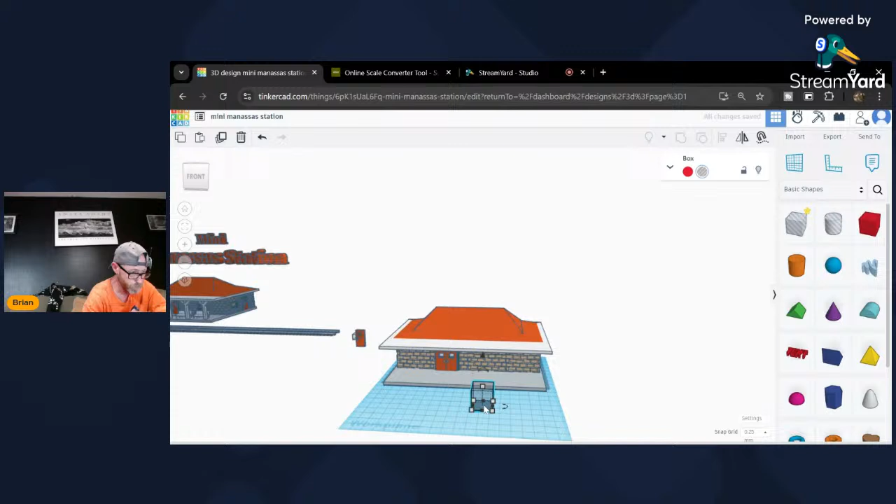Next, we're going to do the ticket window. The ticket window is 15 by 15 and it's up 15. So I'm going to bring this here. 15, enter. 15, enter. Let's see.

All right. Yeah, welcome up North Knowledge, good to have you here with us. You're learning Tinkercad from a new 3D printer's perspective - pretty cool stuff. Yeah, hey Antoine - yeah Antoine, you're right, it does kind of look like one of those. As a matter of fact, I'm hungry too, but I'm gonna stream a little while longer.

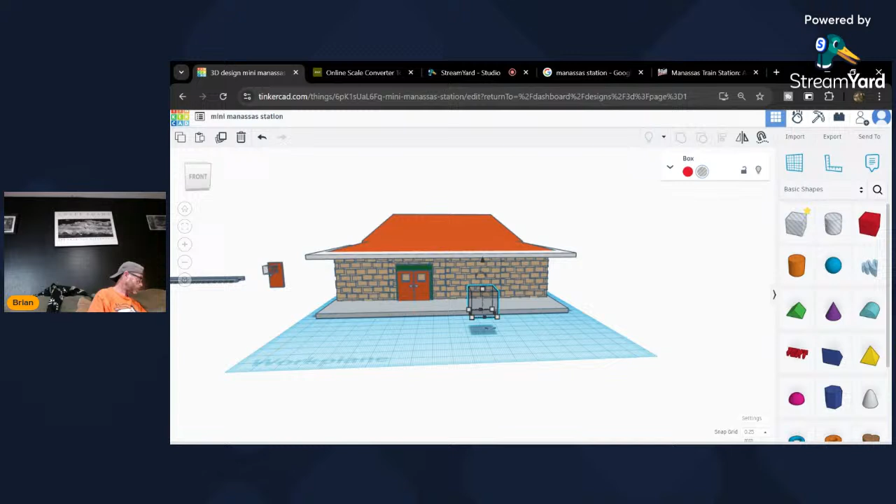These things and stuff up front, that was just going to take a really long time. And this stuff right here, some of it would have been difficult to do. So I figured I would do a bigger one later. All right, we're back to here, 15 by 15, and then we're up 15.

This one's not so tough to do. I just want to make sure it's kind of where I want it. Let me see. I think I did it a little further over last time. All right, we will hold shift and click the wall and group. Because that was the ticket window.

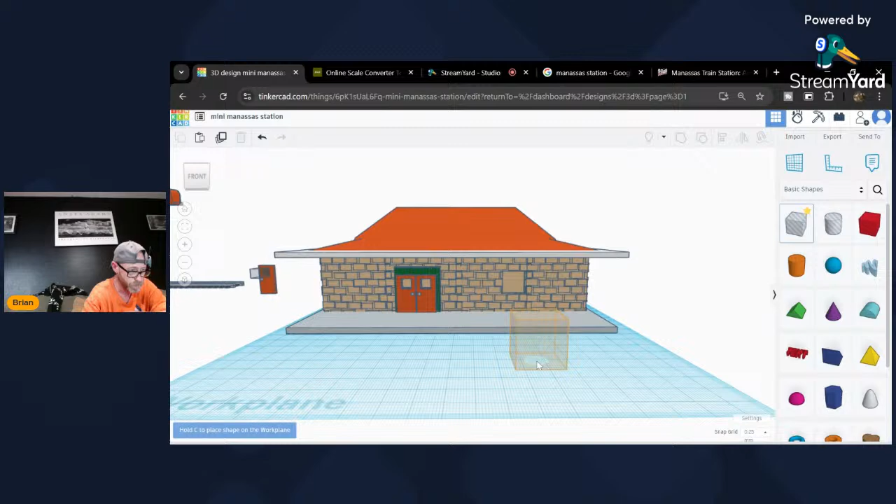And now we want to do a cutout for the ticket window frame, so we're going to go to a transparent one that's going to be 17 by 17, because our window is 15 by 15, okay? And so our cutout for the frame around the window needs to be 2 more than that everywhere, so we made it 17 by 17.

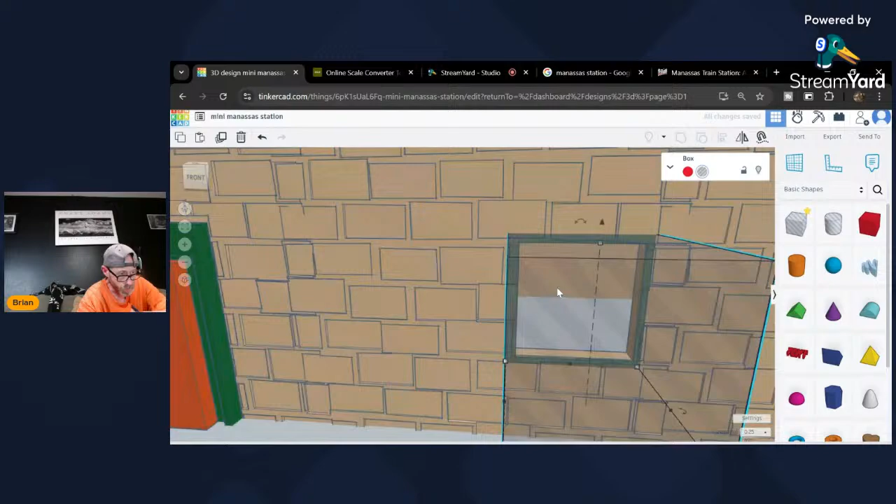Then we're going to come in and we'll do a frame that is 16 by 16. If I'm not mistaken, that would make sense. We do this, and are we pretty even? I think so. And so we're making a place for our window frame to fit in.

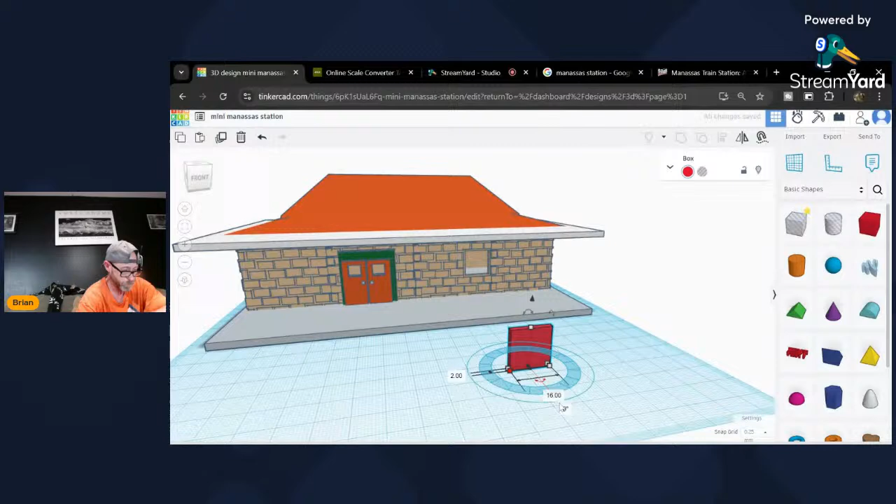Now let's see if I was actually right. Yep, 16 by 16 is the frame, and it's too wide. So we're going to make another frame, 16, 16, and by 2, and make this green.

Oh, wait. I messed up, back up. Undo, undo, undo, undo, undo, undo, undo. Uh-oh. This is supposed to be a different size. All right, the ticket, the window cutout.

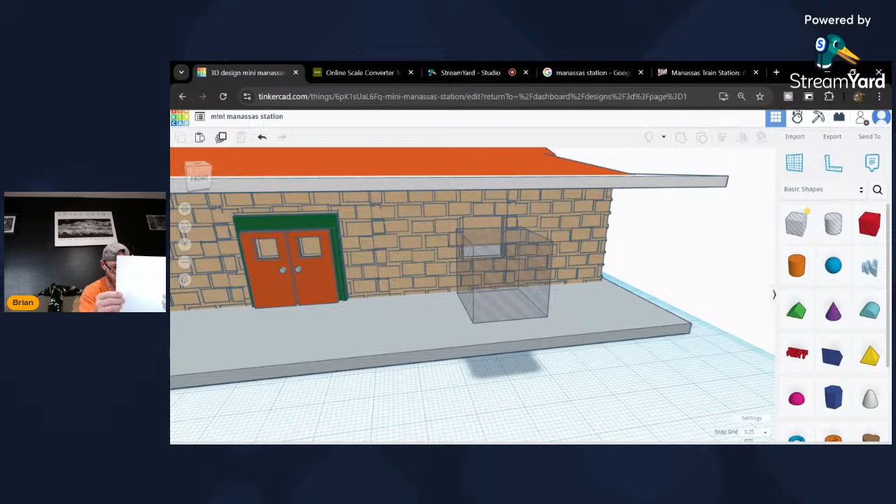Oh, okay, 15, 15, 17, 17. Frame 16, 16. Oh, I see, I got you. I apologize. And we'll go back to here then. Wonder what we did wrong there. All right, here and here. This is right. I say that. No, it wasn't. This is the 17 by 17. Yeah.

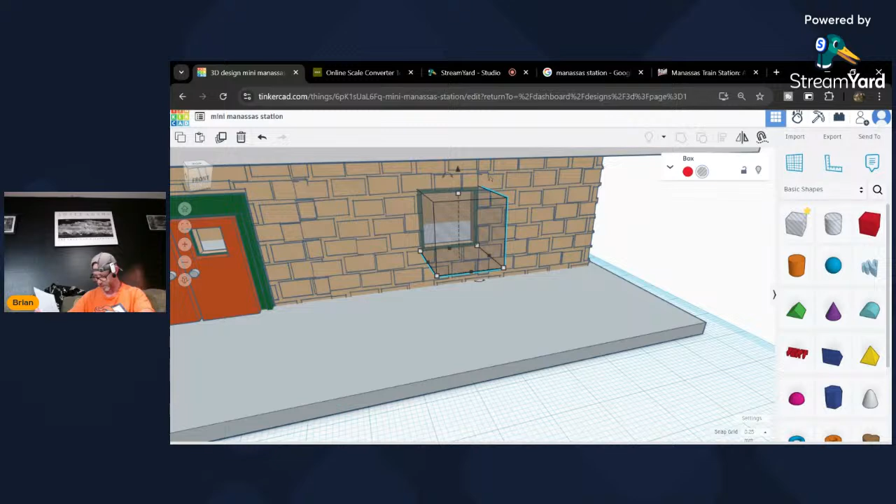All right, ticket window frame. All right, so what we want to do is just make the seat here that's 17 by 17 again. And then we want to do the 16 by 16, by 16 by 2. And we'll pick this up.

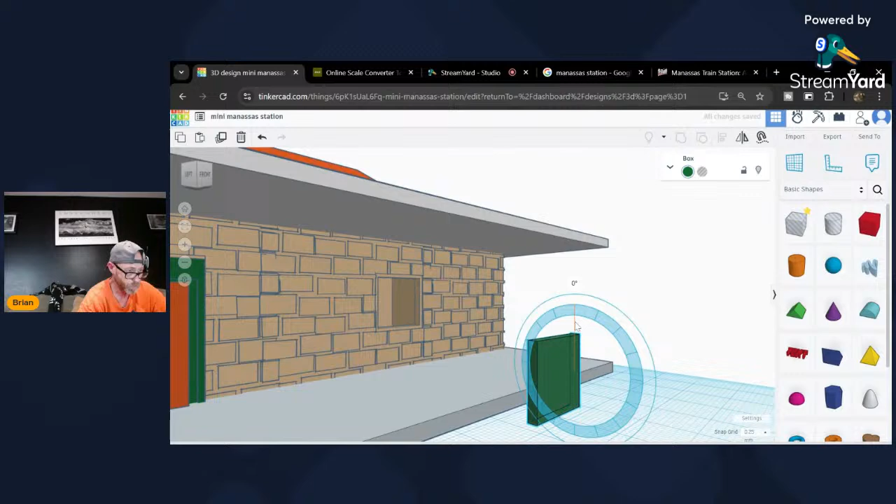And what we want to do is duplicate this. We want to turn it to a transparent. I'm actually going to undo back there. I'm going to drop it. I'm going to spin it because we need to cut the frame out. I don't want to do it with just a cutout. I can make sure that it's closer to right this way.

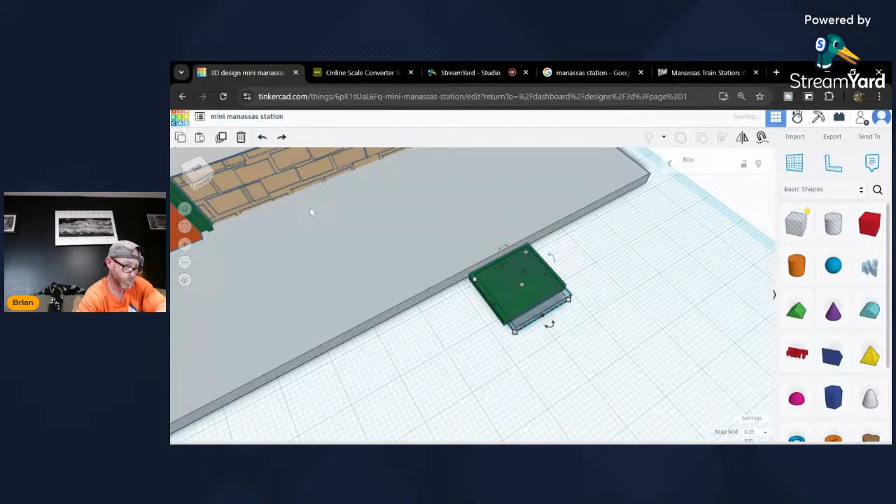All right, so I want to first, I'm going to do duplicate, transform, and here and here and here. Uh-oh, wrong thing, here, here, here. Not cooperating, it says 16. And enter. And so we'll go here, now we got it. There and here. And here and here, and here and here.

And this is the frame that will go here, and I'm going to put a little bar there, like a place where they can rest their hands or arms or whatever.

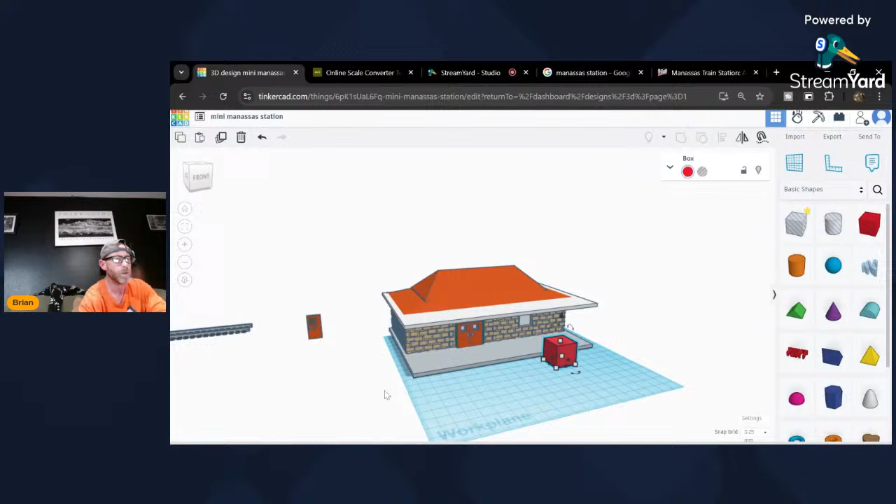And I'm actually going to go ahead and thank y'all for coming tonight and go ahead and stop. I worked today and haven't had anything to eat, so I'm hungry and getting tired. I also wanted to come over here and check a few things, make sure I did have this window right. It does look like I'm doing it right. I just need to put the bar at the bottom, and then we'll proceed on.

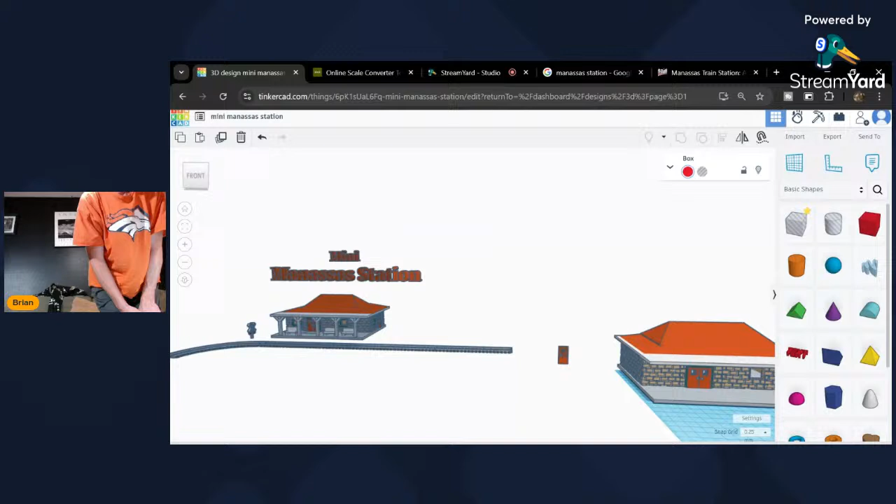I got you, I understand. So you're liking it, Dwight? That's good to hear. I'll be honest with you, I really don't, but I'm pretty familiar with it. I got pretty used to using the filament, so it's different, and it's something to get used to.